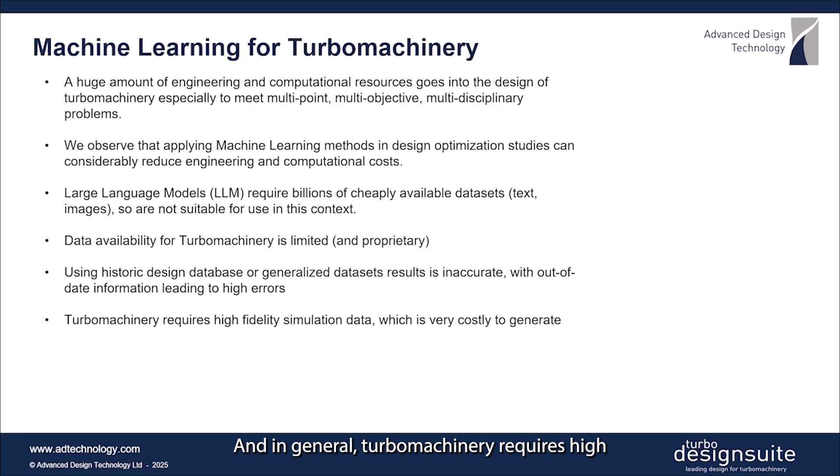Large language models require billions of cheaply available datasets, like text and images, so are not suitable for use in this context. Data availability for turbomachinery is very limited and mainly proprietary. Using legacy datasets is inaccurate, with out-of-date information or poor resolution leading to errors. And, in general, turbomachinery requires high-fidelity simulation data, which is very costly to generate. So, what do we need to build an expert system?

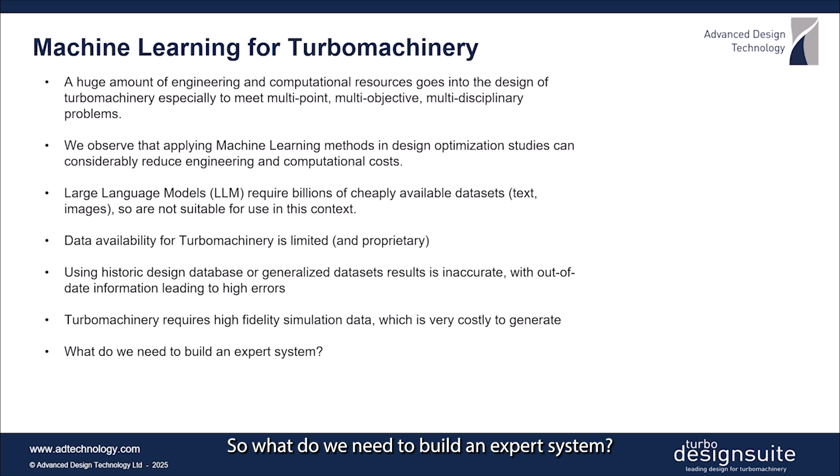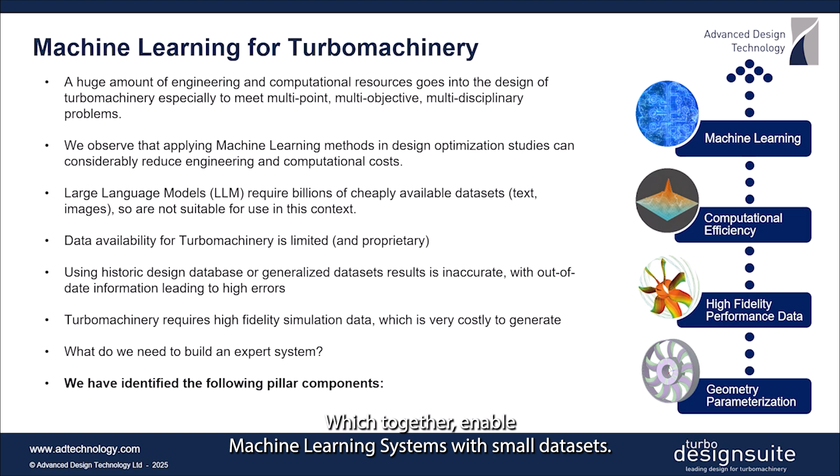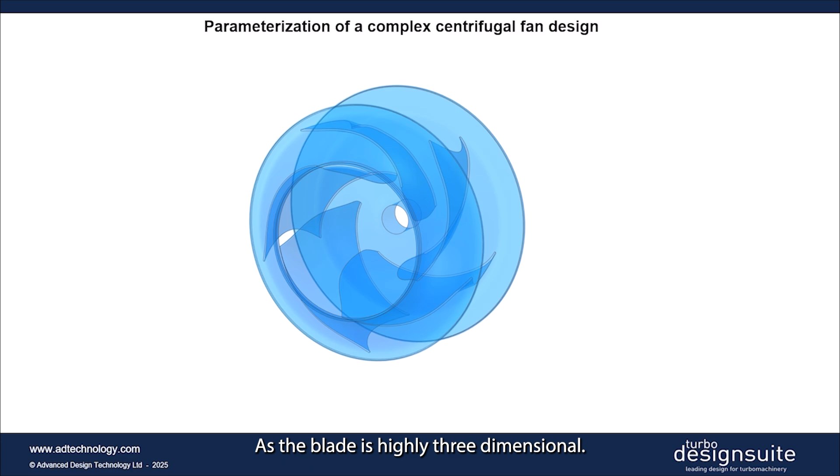We had identified the following pillar components: geometry parameterization, high-fidelity performance data, and computational efficiency, which, together, enable machine learning systems with small datasets. Consider describing the complex shape of a centrifugal fan with a set of parameters. As the blade is highly three-dimensional, one might think that data on a large number of spanwise sections is necessary. The more sections used, the more complex the blade can be.

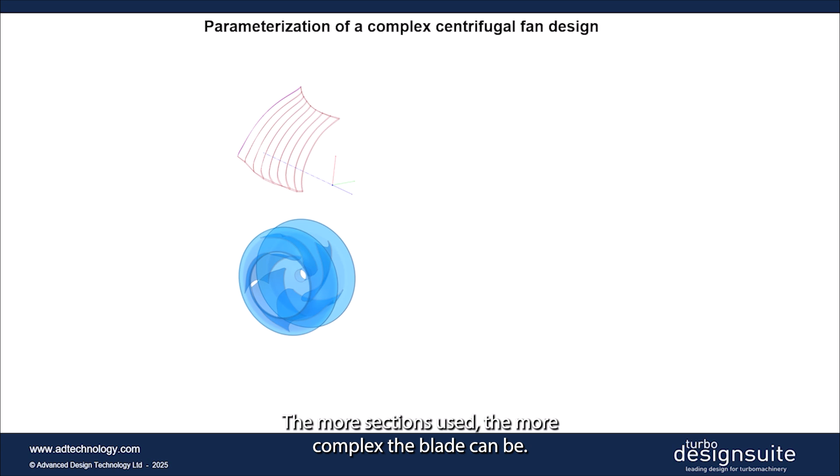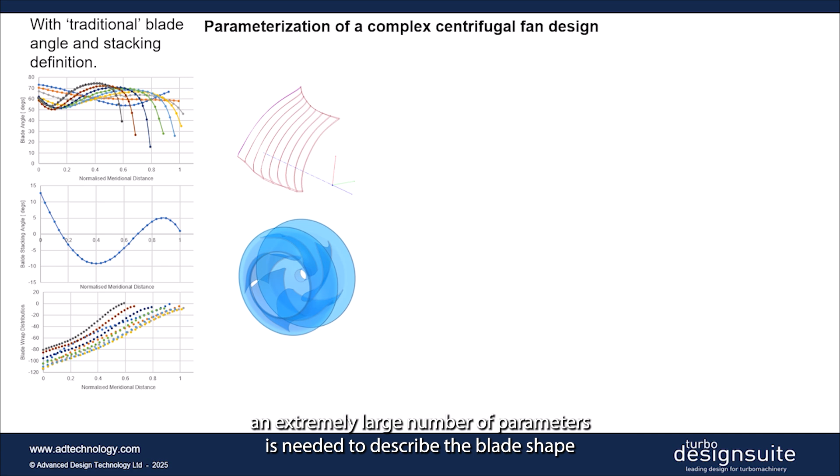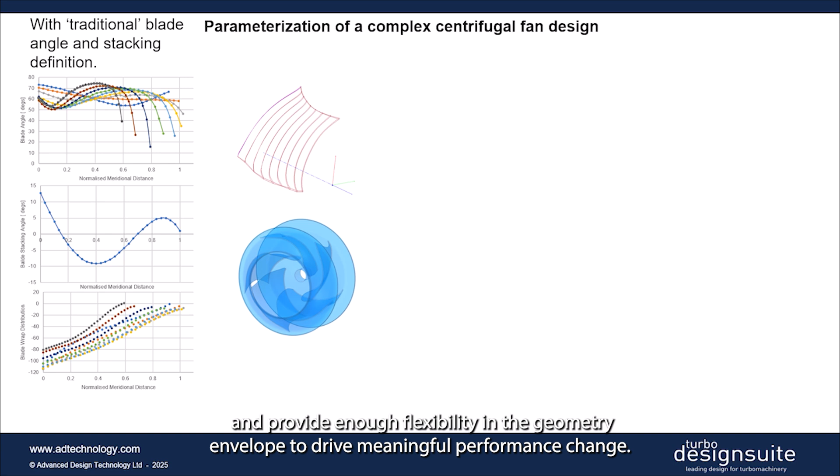Indeed, when using the traditional parameters of blade angle, thickness, and stacking distribution, this is entirely true. What it also means is that, in this traditional approach, an extremely large number of parameters is needed to describe the blade shape and provide enough flexibility in the geometry envelope to drive meaningful performance change. Moreover, once a new shape has been generated, there is no indication of performance for that design, even for the most basic duty requirements. For example, a target head rise for a given flow rate and speed. The first thing that must be done for each and every design is to assess its performance in CFD.

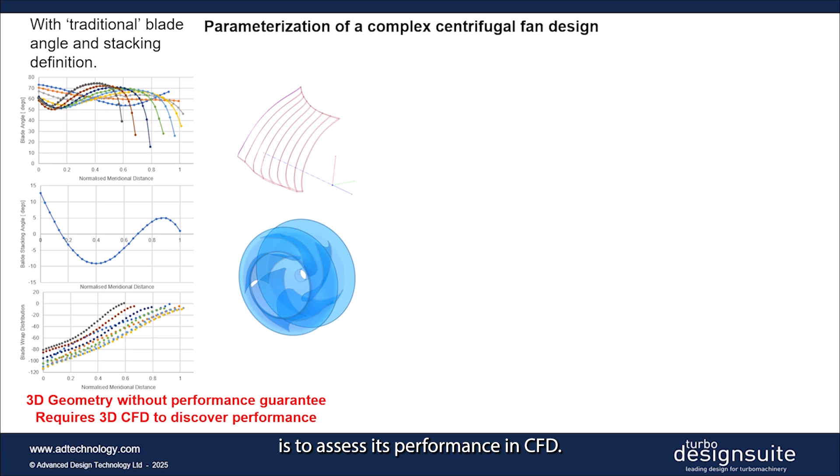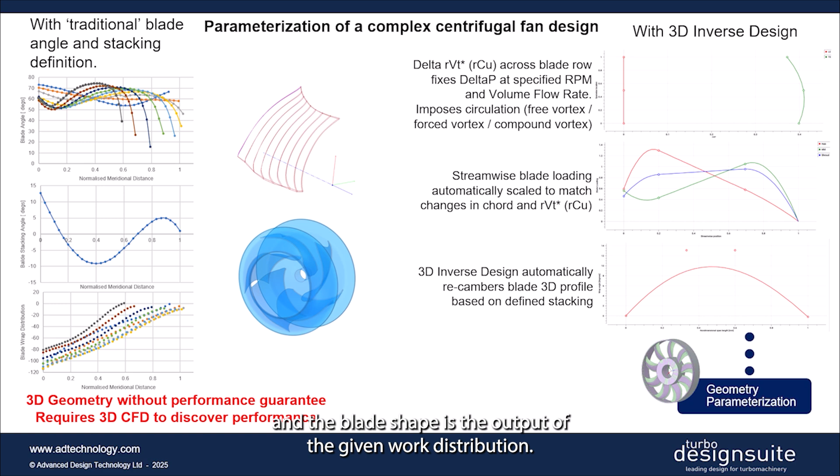By contrast, inverse design requires only a handful of parameters to describe a complex blade shape. The parameters are effectively performance demands, and the blade shape is the output of the given work distribution. The blade shape for a given parameter set is arrived at in a matter of seconds, along with surface pressure and velocity distributions, plus loss estimations. So, when starting to look for optimal designs, the 3D inverse design method is already at a distinct advantage.

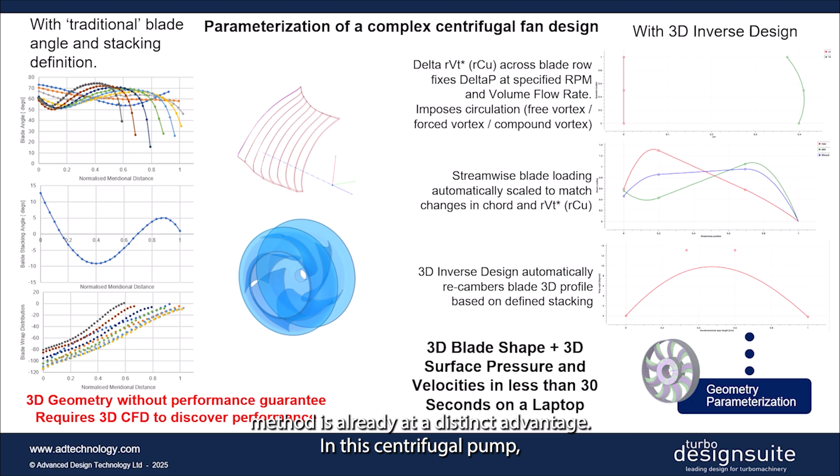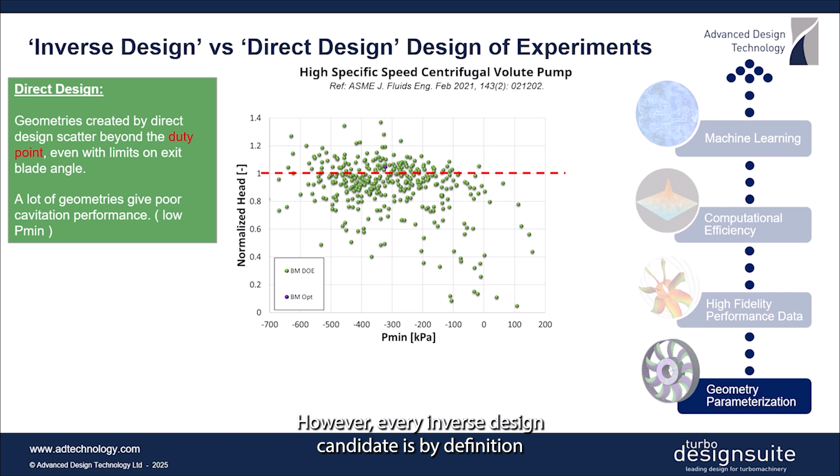In this centrifugal pump study, geometries created by direct design scatter through the performance space, even with limits on exit blade angle. A lot of geometries give poor cavitation performance, as seen in low values of minimum pressure. However, every inverse design candidate is, by definition, going to meet the basic required duty. All candidates appear around the duty point, with only a plus or minus 5% head variation. The distribution of the work across the blade, which we vary by modifying the input parameters, will affect the efficiency and losses incurred in generating that work. This enables creation of accurate surrogate models for rapid multi-objective optimization.

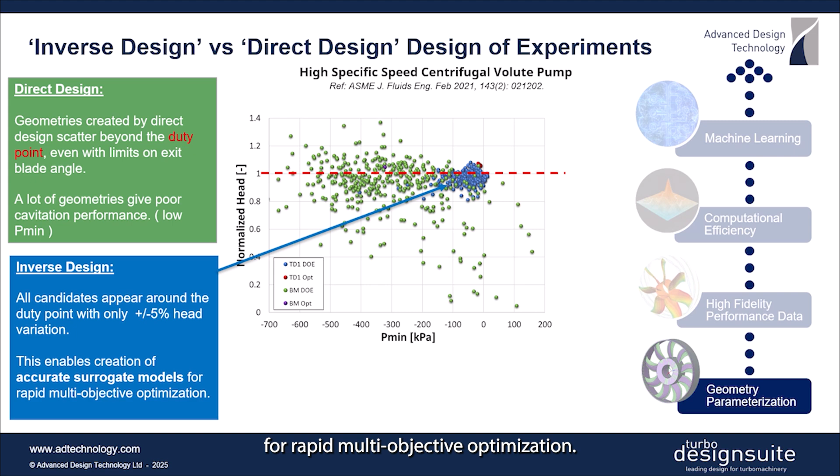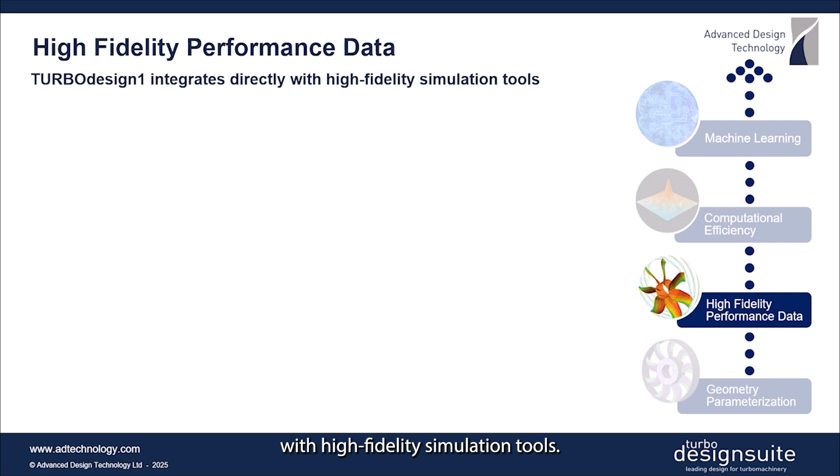For multi-point studies, we need a seamless method for sending and retrieving high-fidelity CFD data to and from the optimizer. TURBOdesign1 integrates directly with high-fidelity simulation tools. It supports all turbomachine types. It is CFD agnostic. Templated methods mean a consistent analysis workflow. It supports local clusters and HPC. Automated meshing, pre-processing, simulation, and post-processing are activated with just a few mouse clicks. And multi-point results are integrated into the optimization process.

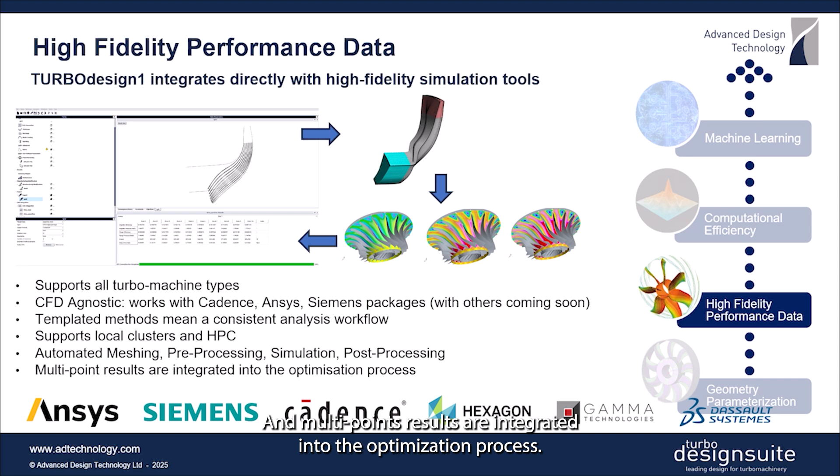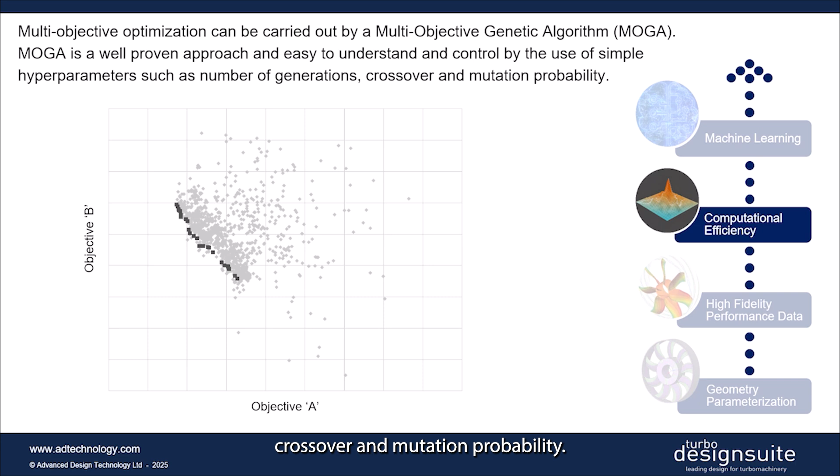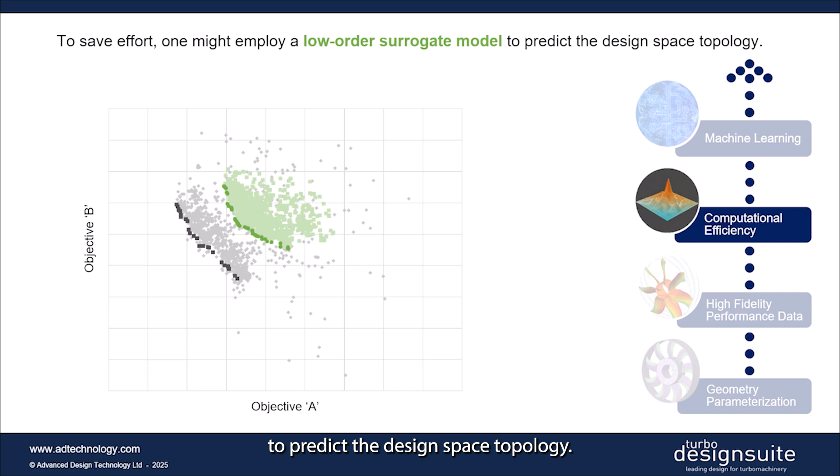Turning to methods for efficient optimization. Multi-objective optimization can be carried out by a multi-objective genetic algorithm. This is a well-proven approach and easy to understand and control by the use of hyperparameters such as number of generations, crossover, and mutation probability. However, it has the distinct disadvantage of having to generate a large number of non-optimal candidates in order to provide enough variation in the population. To save effort, one might employ a low-order surrogate model to predict the design space topology. But surrogate models lack the accuracy of high-fidelity backed methods and can lead to false optima being identified.

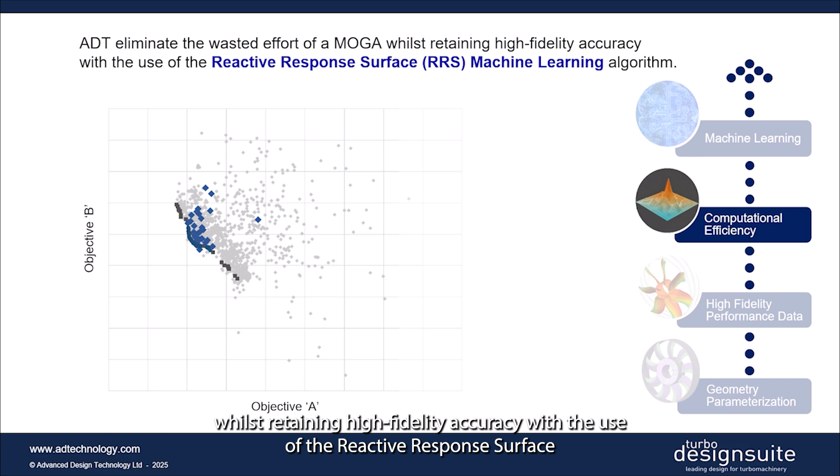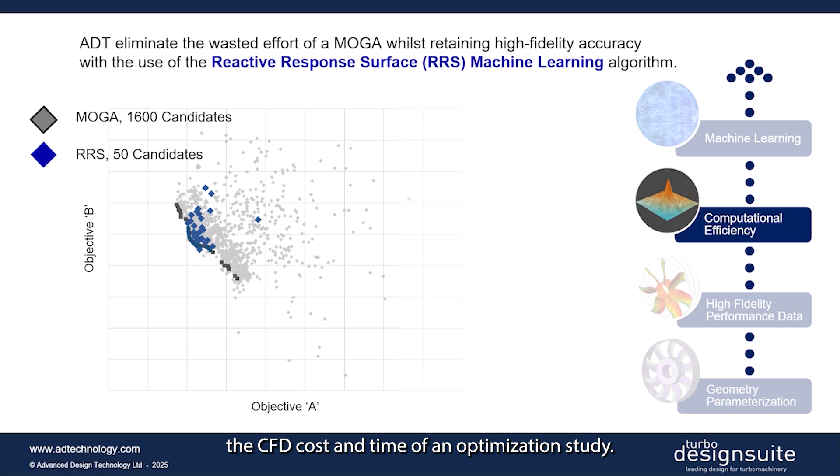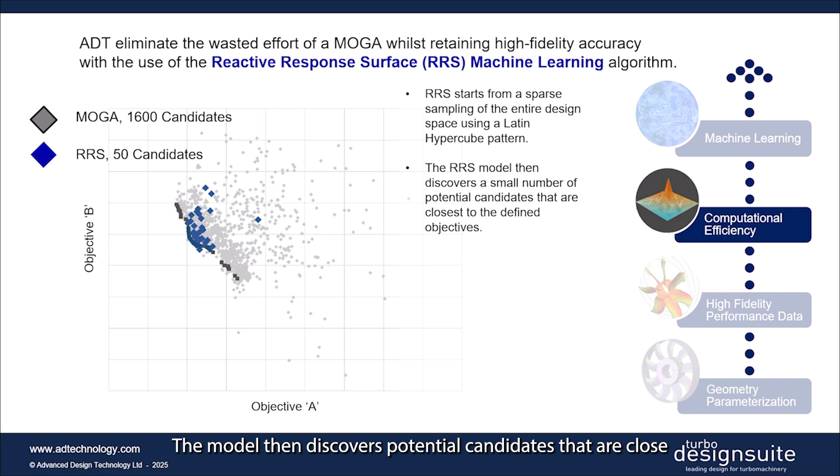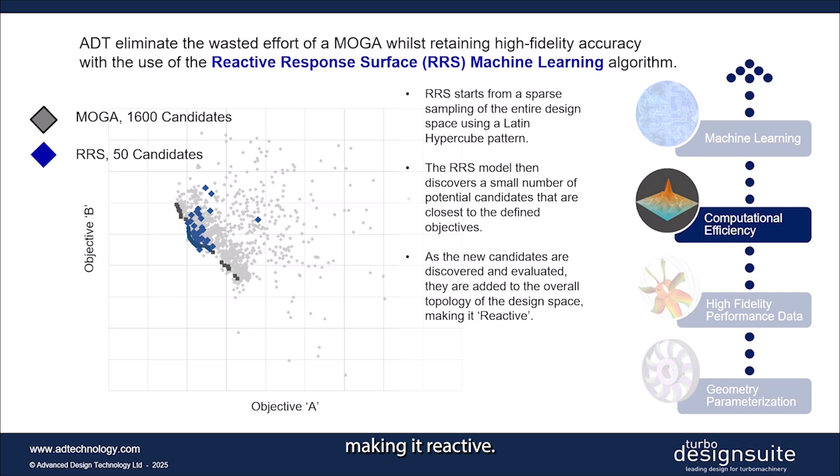ADT eliminate the wasted effort of a genetic algorithm whilst retaining high-fidelity accuracy with the use of the reactive response surface machine learning algorithm, which can reduce, by orders of magnitude, the CFD cost and time of an optimization study. RRS begins with a sparse sampling of the design space using a Latin hypercube pattern. The model then discovers potential candidates that are close to the defined objectives. As the new candidates are evaluated, they are added to the topology of the design space, making it reactive. For multipoint simulations, we assess performance in CFD, whilst the RRS optimization is ongoing.

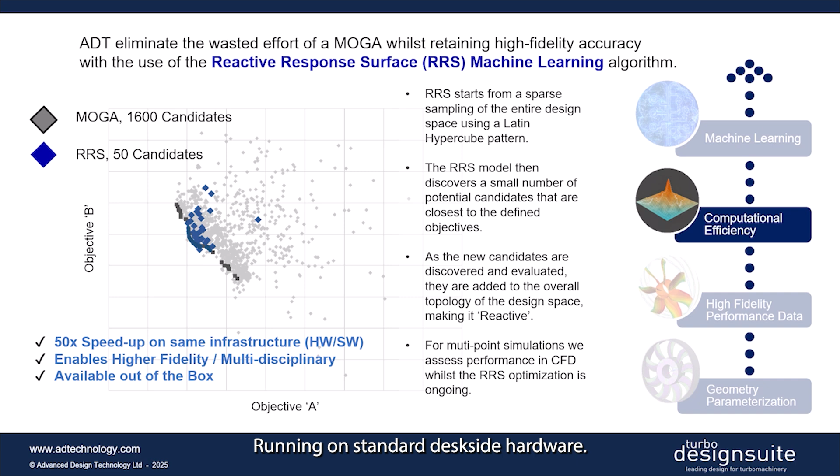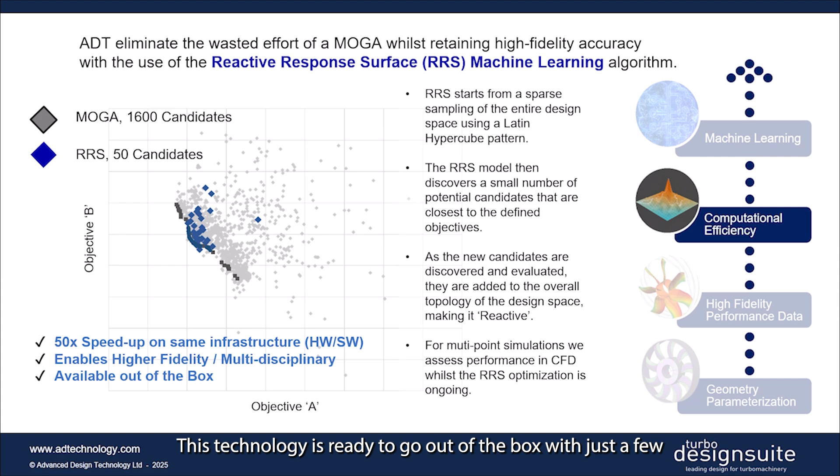The combination of low-dimensional design space, performance specified as an input, targeted integrated use of high-fidelity simulation, and intelligent reactive design space exploration means that we can achieve orders of magnitude speed-up in the search for multi-objective, multi-point optimal designs, running on standard desk-side hardware, whilst exploiting even higher fidelity and multidisciplinary simulation. This technology is ready to go out of the box, with just a few mouse clicks to set up and run.